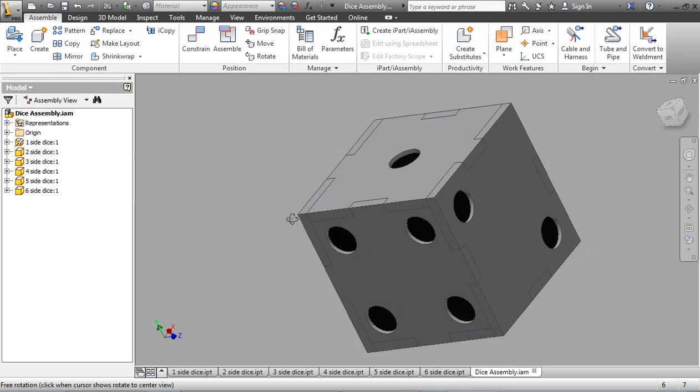Exporting parts to be cut on a laser engraver using Autodesk Inventor 2013 academic version. In this tutorial, we're going to show how to get from an assembly and 6 individual parts out to a laser engraver so it can be engraved or cut out.

To start with, we will go up to the application menu, New, and Drawing this time. From here, what we're going to do is delete the borders and things, so all we're left with is the sheet.

Next, we're going to right mouse click on the sheet, Edit Sheet, go to the custom size for the laser engraver. In this case, the laser engraver is going to be 12 by 24, so the bed is 12 high, 24 wide. We'll click OK and the paper changes.

Next, we go to Base. From here, what we're going to do is find the parts that we have in our model. So I'm going to click Cancel for a second. Here's our final assembly, but you can see we have all the individual parts open right now. This makes it a lot easier.

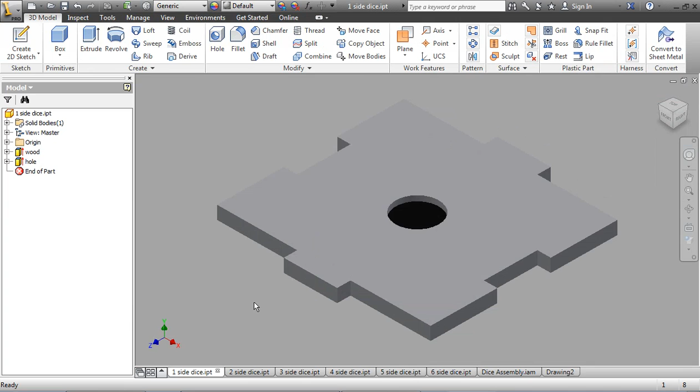So go back to the drawing, go Base, and currently when you click on a top view and come out here, you will see that I have a part selected. In here are all the parts that are currently open. So if I click on the assembly, you'll see that I have the assembly view, and you'll see that it is not in an individual piece.

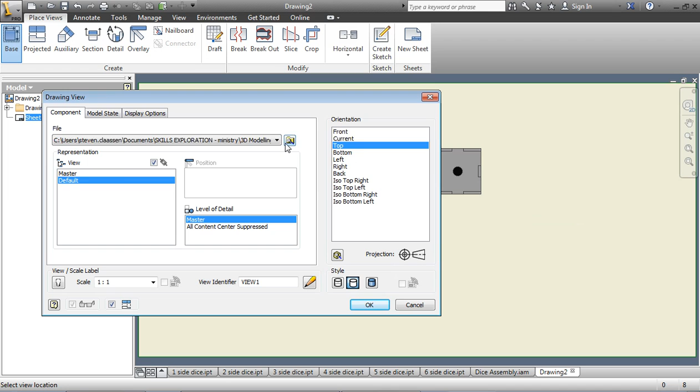So we're going to click on Dice 1, and we're just going to put one in place. Then we're going to go back to Base. We'll click on Dice 2, and 3, and 4, and 5. So grab 2, we'll keep them in order here, the top view, then we'll go back to Base.

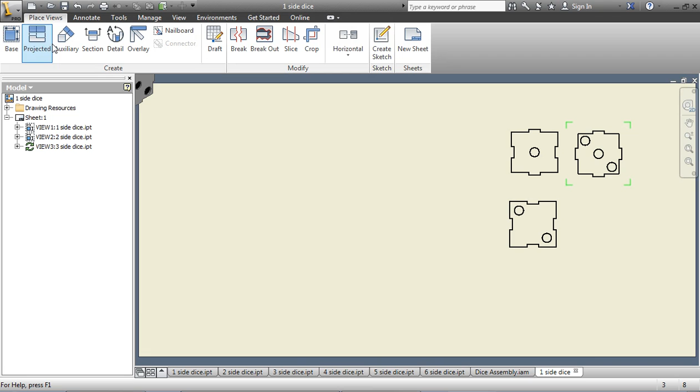Click on the third one, top view, and we're just going to put them all on the screen here. And then Base 4, and top view. Base, and then part 5, and the top view there, and finally Base, the last view, which is part 6, and it is right there.

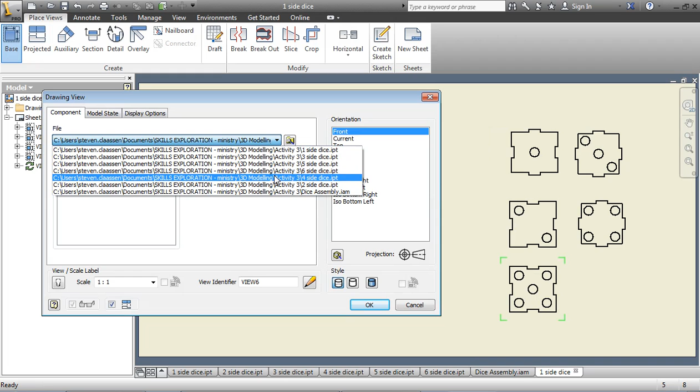And we'll click on the top, and there we go. So there's all our views now on the sheet. Next, what we have to do is set up the color so that the laser engraver will cut it.

So I'm going to go over to Annotate. From Annotate, we'll go to Edit Layer, and we're going to create a new layer, and type in laser engraver. From there, we'll change the color to red, because most laser engravers work off the color red.

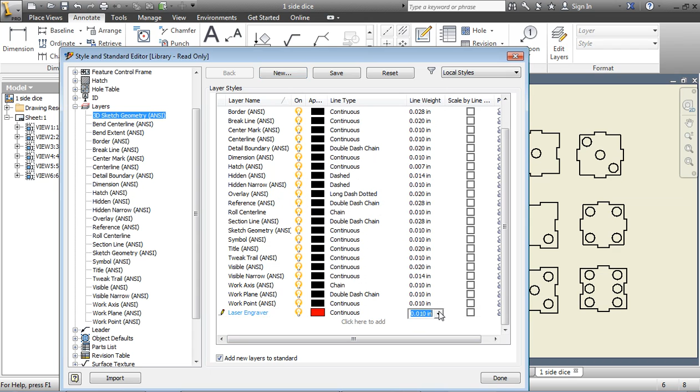The line will be continuous, and finally, the line width is going to be set to 0.001, because that is what lasers typically cut off of. And we'll save the layer.

Next, we'll simply highlight everything, and from here, we'll scroll down and find the laser engraver layer. You'll see now that they've been changed to red. From here, I'm just going to move it over.

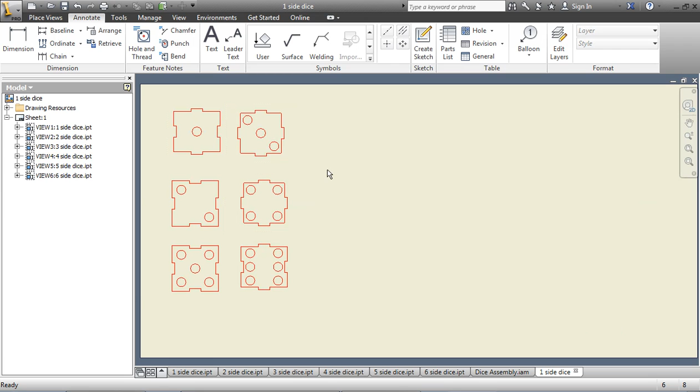Now I can export to my laser engraver software. So in this case, we'll go to File, or the Application menu, down to Print. In this case, we will change it over to the laser engraver, which in this case is VLS 3.50.

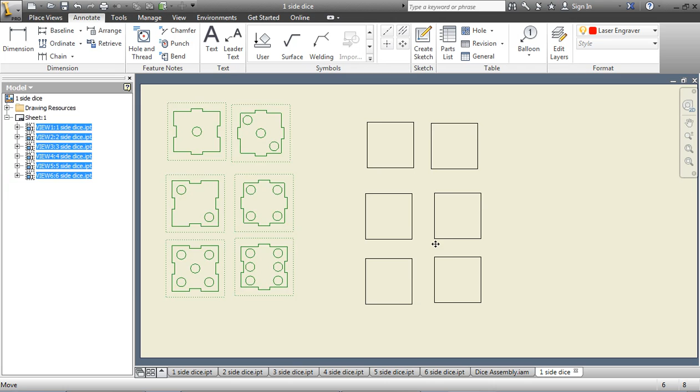We'll click on Preview, and because it doesn't show up on here for some reason, we're just going to highlight this and move it over to the center. And we'll click on File, Print once more.

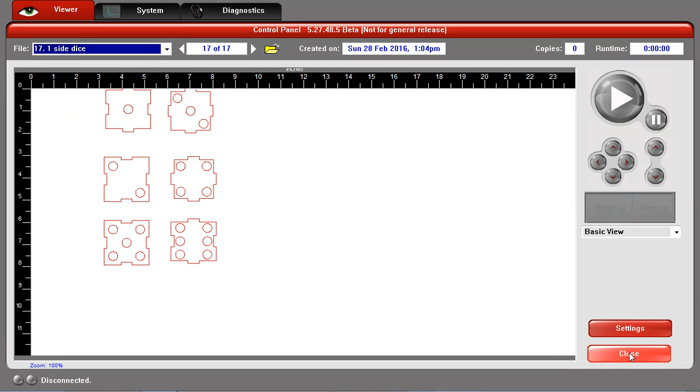In this case, for some reason, my software is not quite right, but there you can see that the colors come in as red. Then I would simply print out to my laser engraver software, start it up, which is off the screen here, and you can see that it's coming in red. Unfortunately, I've kind of got it right off the screen there, but that's it. That's how you get from Autodesk Inventor to laser engraver software.